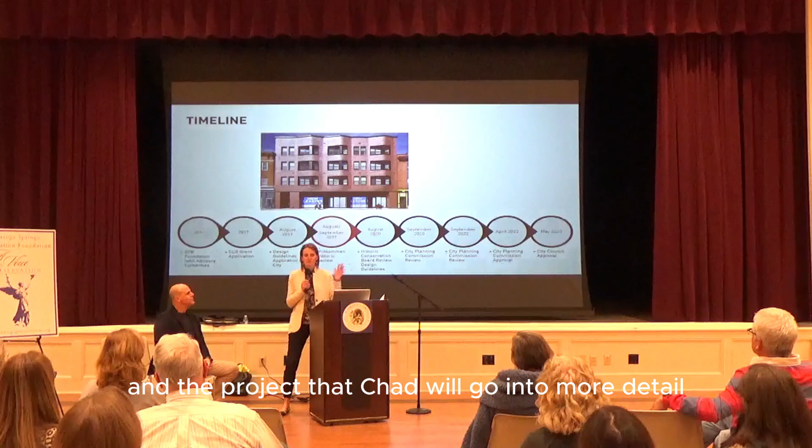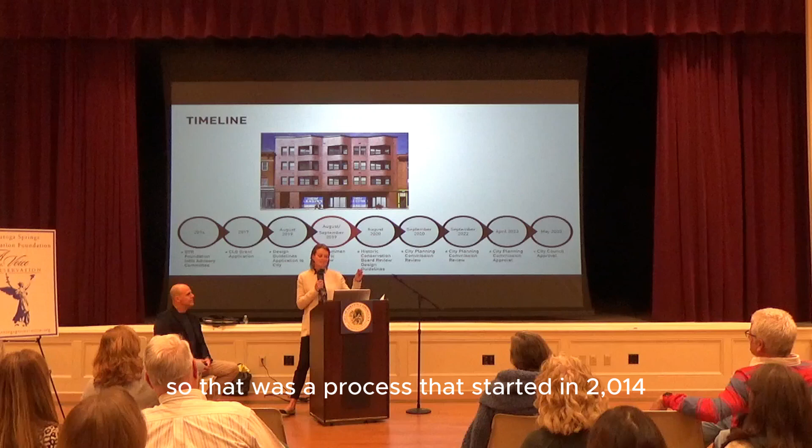So the city has, in recent years, had a lot of conversations about how to address that infill. And the project that Chad will go into more detail, Willkommen, it really fell right in the middle of a very long process of revising the Over-the-Rhine design guidelines. That was a process that started in 2014 and ended with their final adoption in 2023.

And Willkommen was going through the review process in 2019, right at the same time that the first draft of the guidelines was being presented.

So taking a step back, Over-the-Rhine saw the traditional patterns of disinvestment many urban areas saw through the 60s. Population declined, but many of the buildings remained intact.

By 2003, that was when the previous guidelines were adopted. The majority of development happening was rehab. There wasn't a lot of infill happening. There was a resurgence starting, renewed interest in the neighborhood, but more rehab and redevelopment of existing buildings than investing in infill. So it was not a primary consideration when those last design guidelines were developed.

2005 was really when the neighborhood started to see its first major infill construction begin. You can see this project on the screen. This is at a relatively prominent gateway site along the former site of the canal on Central Parkway. This project was ground floor retail, 25 residential condos, and a parking garage.

And from there, throughout the next decade, we saw more and more infill. Various forms, various scales, as you can see here, from row houses to larger scale mixed-use, multifamily development. So much so that by 2014, the conversation was starting about needing to look more closely at the infill and the design guidelines for the city.

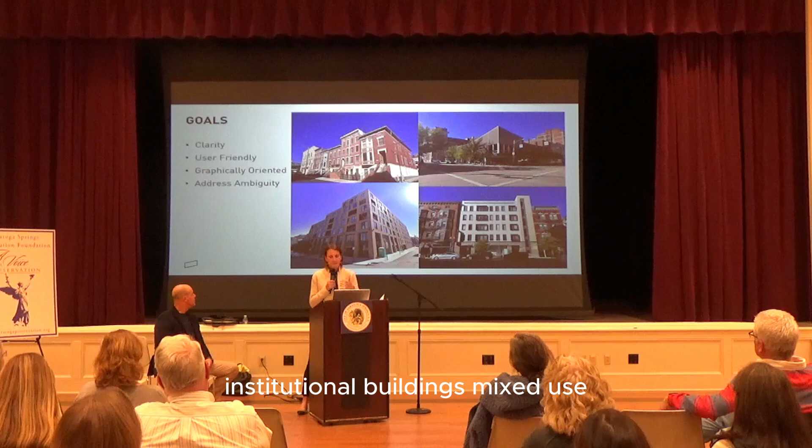Institutional buildings, mixed use, row houses, that we felt were meeting that goal of contemporary but compatible. And really our goal was to make it more user-friendly, more graphically oriented, and provide more clarity.

Over the next 2 years, before the first draft was published, I think it's fair to say that somewhere in there we lost a little bit of that goal to make them more user-friendly, as we went from a 3-page document to over 60 pages of guidelines in that first draft.

So when we got the first draft of the guidelines in 2019, there were concerns expressed by city staff, design professionals, developers, and other neighborhood stakeholders. They really fell into 5 primary buckets: they were too prescriptive and formulaic, the way height was addressed, the extensive use of must instead of should in the language, how storefronts were addressed, and how modern features were addressed by the guidelines.

I'm just going to walk you through what the issues were in that first draft. When we look at being too prescriptive, these guidelines use the word median a lot.

There were a lot of calculations needed just to understand what your massing could be. For example, building width should be consistent with the median building width of non-monumental contributing buildings located within the same block face. So if you have a vacant site, before you can even start to wrap your head around what massing is appropriate, you'd need to survey the whole block, figure out what's contributing, what's not, what's monumental or non-monumental, and then do the calculation. It was overly burdensome to start the process, and I think it was well intended — the idea was to quantify what compatible is — but that's a hard thing to make a formula get the right outcome for.

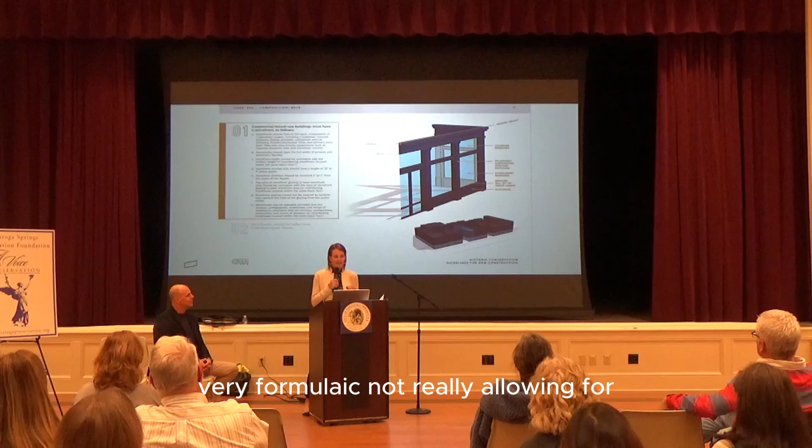Storefronts had a similar issue — a lot of use of median, a lot of very specific measurements, like 2 inches to 4 inches of glass inset, 18 inch sill height. Again, very formulaic, not really allowing for a contextual review of the block and developing your design from there.

One of the things we were seeing in infill design, as people moved back to the downtown urban setting, is that residents wanted features that weren't part of the historic landscape. They wanted roof decks and balconies in a dense urban setting, some outdoor space. They wanted a place to park their car off-street, and they wanted a vehicular entrance.

The initial draft of the design guidelines again had a lot of musts that left no ability to design these features in a context-sensitive manner. It was very prescriptive — for example, a roof deck was not permitted to have any access beyond the minimal stair tower or elevator shaft needed to reach it. It didn't acknowledge that you could have a bigger room or space to access the roof deck that could be entirely invisible from any vantage point on the streetscape or from farther away.

So it's not all doom and gloom. We resolved the issues. It was a longer process. This draft was presented, as I said, in 2019.

Our process is that the Historic Conservation Board reviews the guidelines. They make a recommendation to the City Planning Commission. Planning Commission makes a recommendation to City Council. They ultimately adopt the legislation.

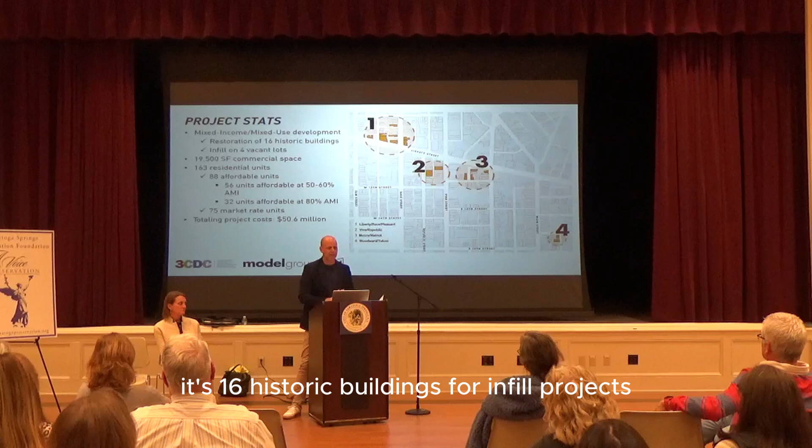So it is scattered around Over-the-Rhine, but it's concentrated in these 4 nodes. Overall, the project is built up of 16 historic buildings, 4 infill projects. So a lot of commercial square footage, 163 residential units. Half of those are affordable. We're at 50 to 60% AMI, which is a very affordable rate. The other half are market rate apartments, so anybody in any income bracket can rent those.

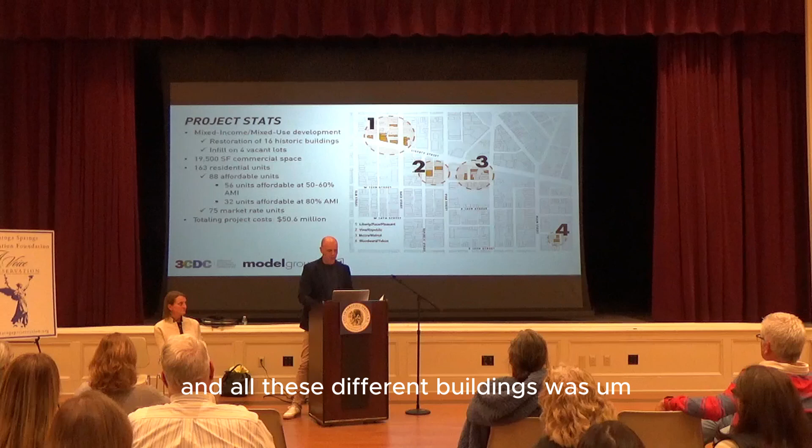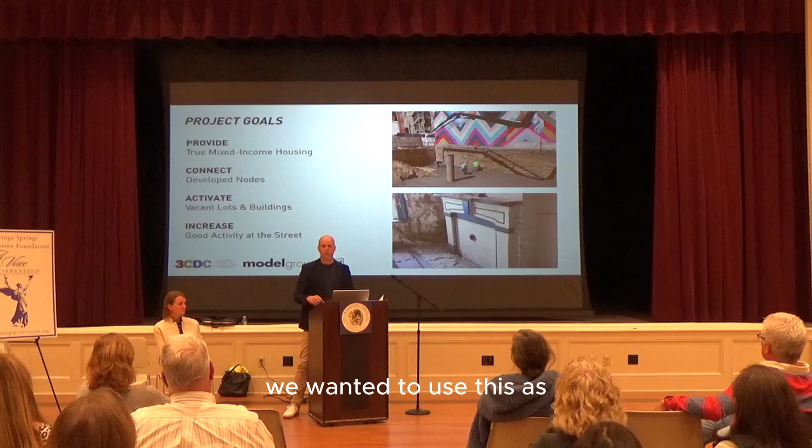And pooling those together into all these different buildings was a challenge. But we had these goals from the start: one, we wanted to provide true mixed income housing that was indistinguishable from the market rate housing in the area. We wanted to use this as another catalyst to connect developed nodes. In this slide, you see that the projects were really concentrated in these areas. It wasn't fully scattered throughout.

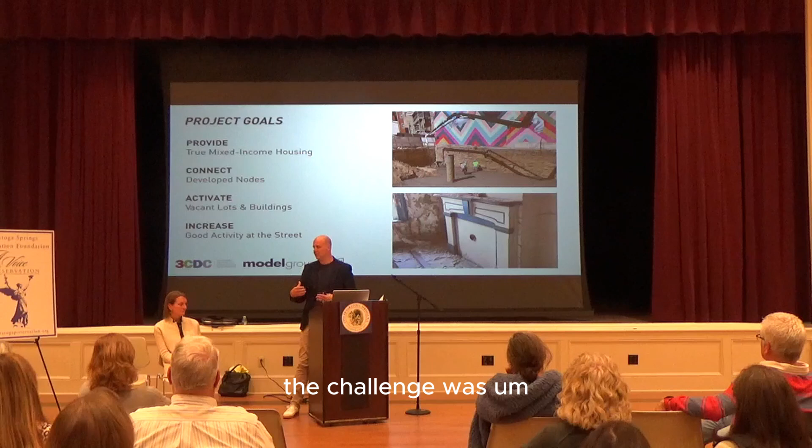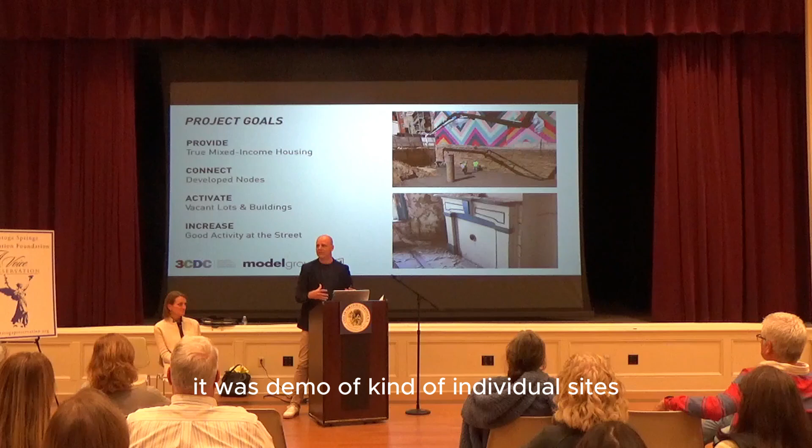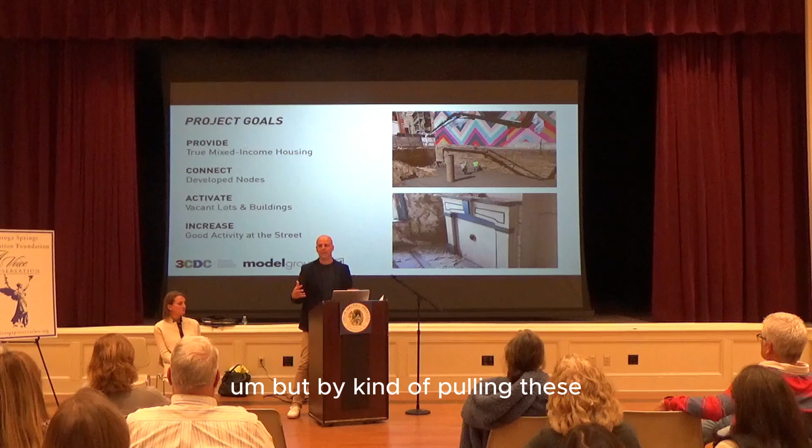We wanted to activate those vacant blocks. The challenge was, in the slide we showed where the demo happened of the individual buildings, it wasn't demo of a big site, it was a really easy development. It was demo of individual sites that all left their foundations. So they're smaller sites, so it was more difficult to make the numbers work with a smaller site. But by pooling these, we wanted to find a way to activate as many of those as you could.

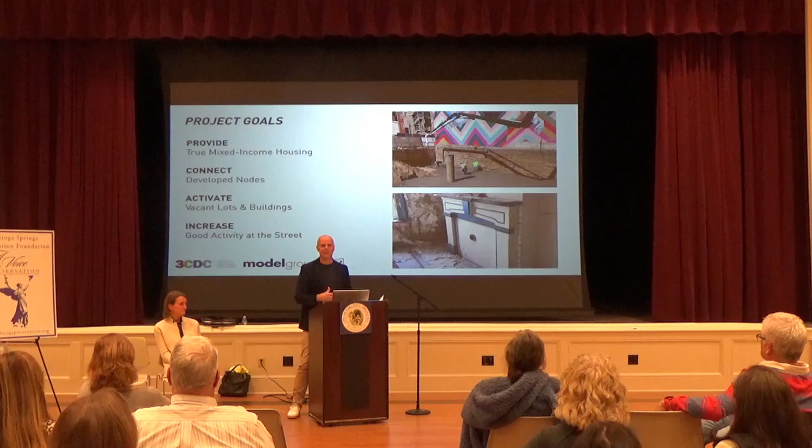So we could really re-stitch the fabric of the neighborhood together. Everybody knows those vacant blocks really create a discontinuous neighborhood, and increased street activity is the final goal.

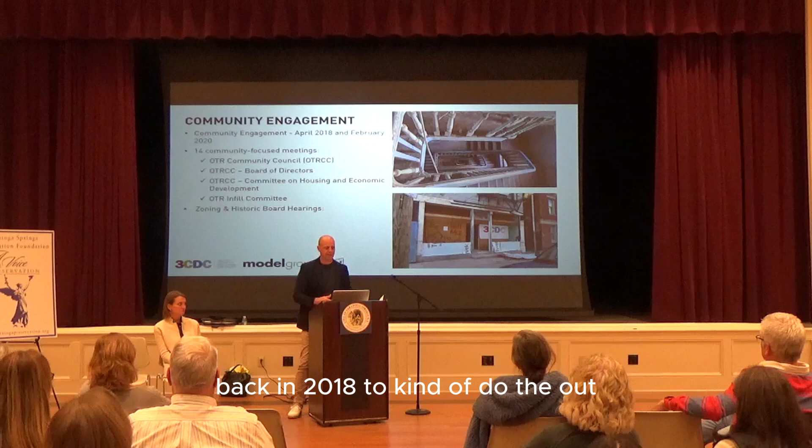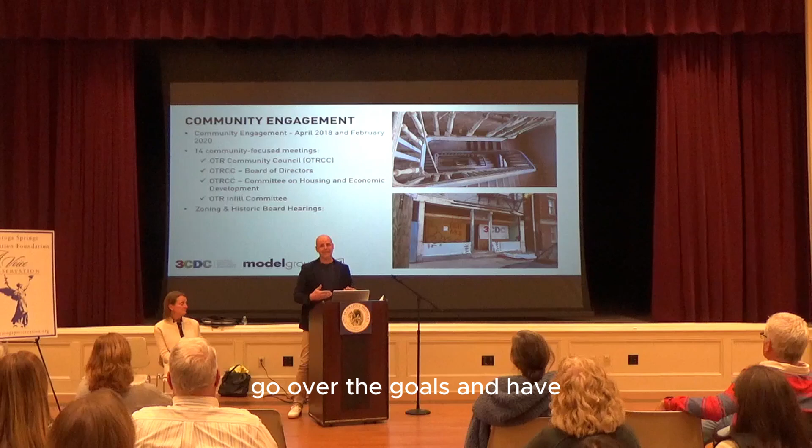So we started early on, back in 2018, to do the outreach and engagement to see what the neighborhood wants, how do we put this project together. And that's also when we started meeting with the historic staff of the city, to start brainstorming about this project and what it could be, and go over the goals, and have, I wouldn't say shared goals, but at least let them know what our goals for the project were.

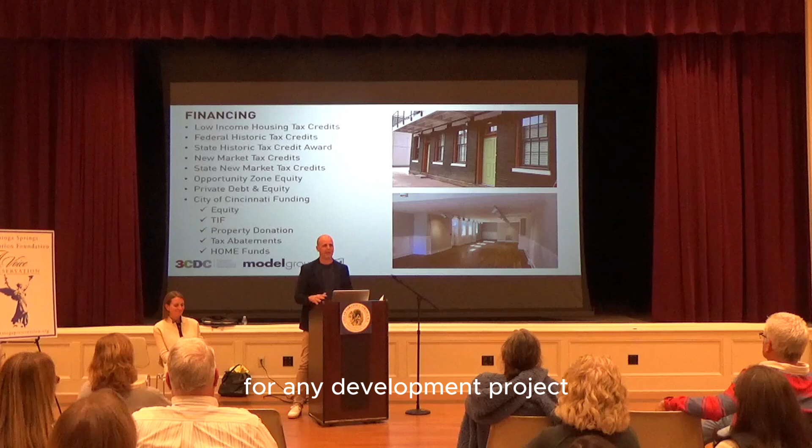Really quick on financing, because this is the most complicated capital stack for any development project I've been a part of. The developers had to access 13 different funding sources in order to put this deal together.

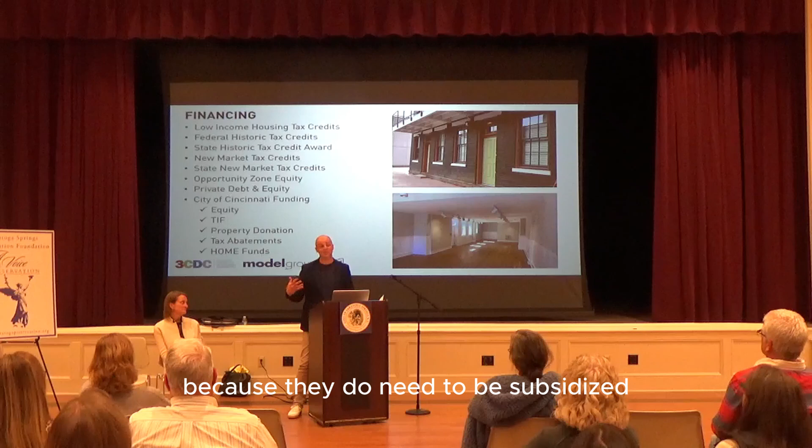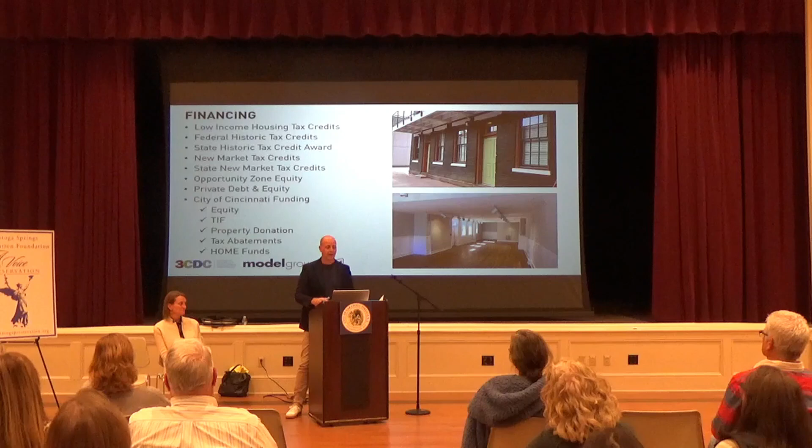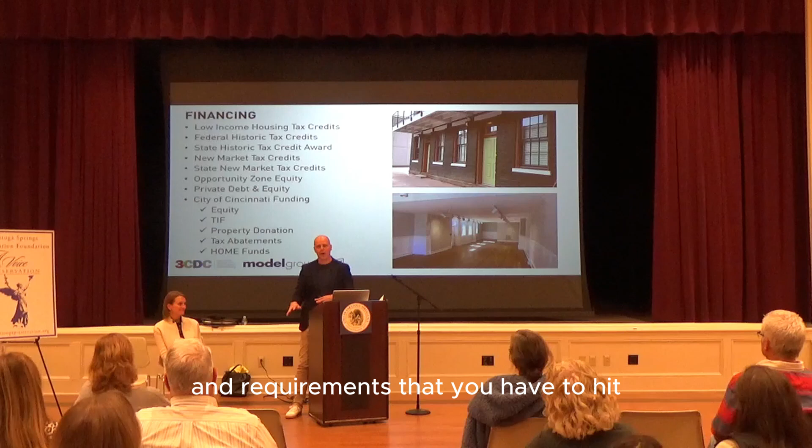It's honestly why a lot of affordable housing projects don't get done, because they become so complicated, since they need to be subsidized. We had state historic tax credits, federal historic tax credits for the historic renovations, new markets tax credits, opportunity zone equity - all these different funding sources. What's interesting from an architecture and development standpoint is that all of these funding sources have different timelines and requirements you have to hit, and it becomes this complicated web of what the project can be and the timeline it needs to be on to make it happen.

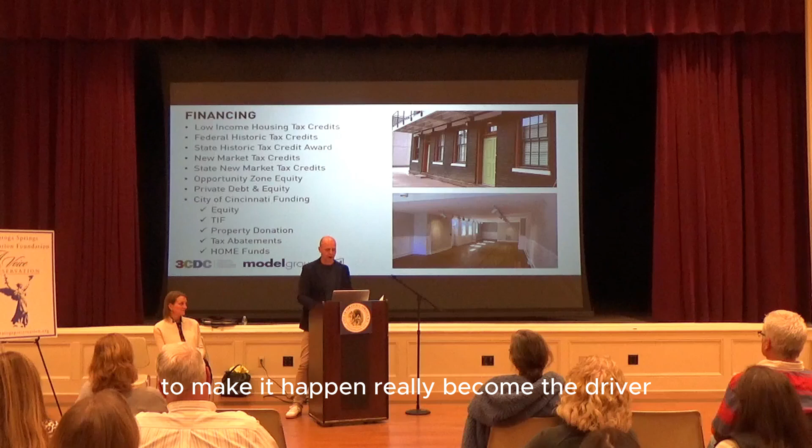That's the capital stack.

The other complicated issue with this project was that we had two clients: the Model Group, who became the operator and owner for all the residential pieces of the property, and 3CDC, the Community Development Corporation I mentioned, who became the owner and operator of all the commercial space. To do that, we actually had to create air lots and split the ownership. So each one of these buildings and lots has three-dimensional lot lines that separate the ownership, giving each individual building separation.

That was difficult. For the infill design - I mentioned this project has 4 infill projects, but it also has all these other historic projects. These are the before and after pictures, showing all this Italianate architecture. This investment helped stabilize vacant or disinvested buildings that were ready to fall down, and really protect the historic fabric we were looking for.

But it also included - and this was the important piece to make this deal work - I'm going to talk about 3 of the infill projects that were part of these scattered sites, each in a different zone.

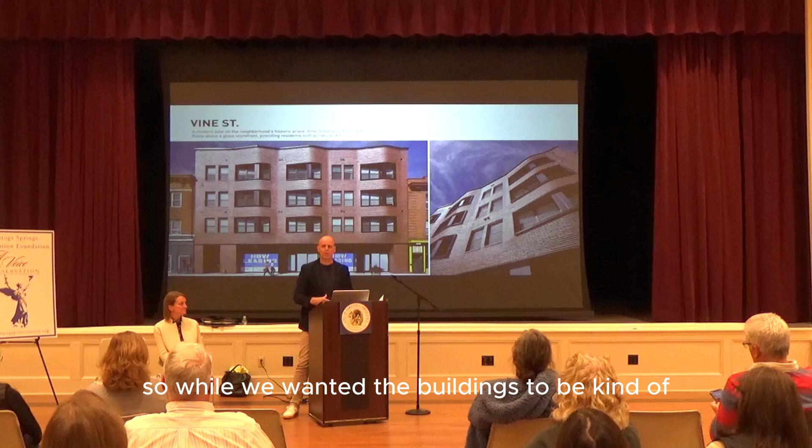It's all part of one project, but Over-the-Rhine is not a homogeneous neighborhood. There's a lot of differences in terms of the streets, the different neighborhoods within Over-the-Rhine. We wanted to recognize that. So while we wanted the buildings to be what we call siblings, they weren't twins. They had a lot of the same kind of language in terms of the palette, but each one was responding to a slightly different context.

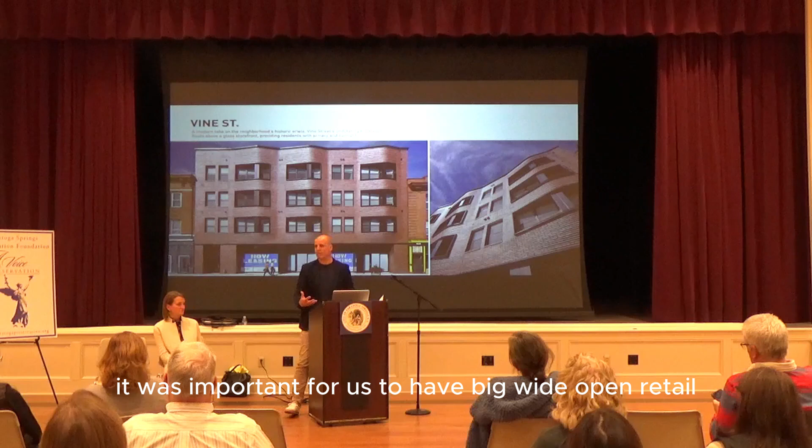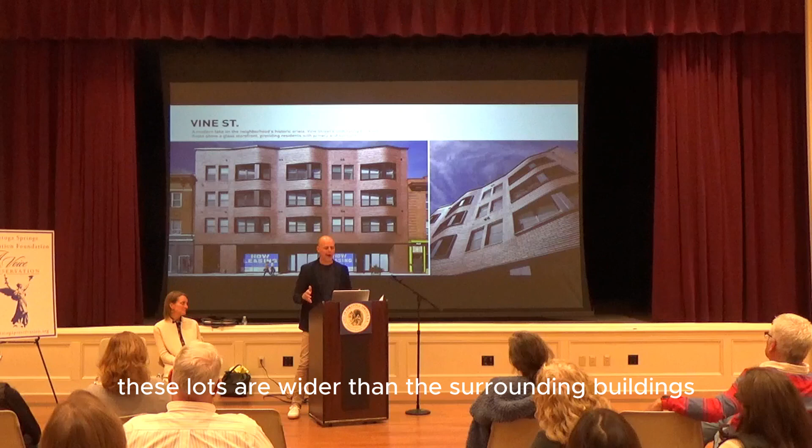In terms of the immediate street it was on, for Vine Street, which is a much more commercial street than the others, it was important for us to have big, wide open retail. This picture was taken before the retail came in, we'll update that. The other piece is, from a context standpoint, these lots are wider than the surrounding buildings. The typical lot is about 25 feet wide, and we're doing much wider development.

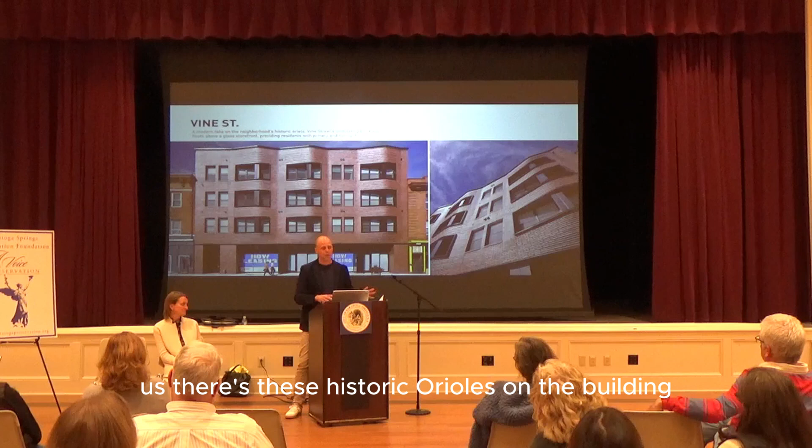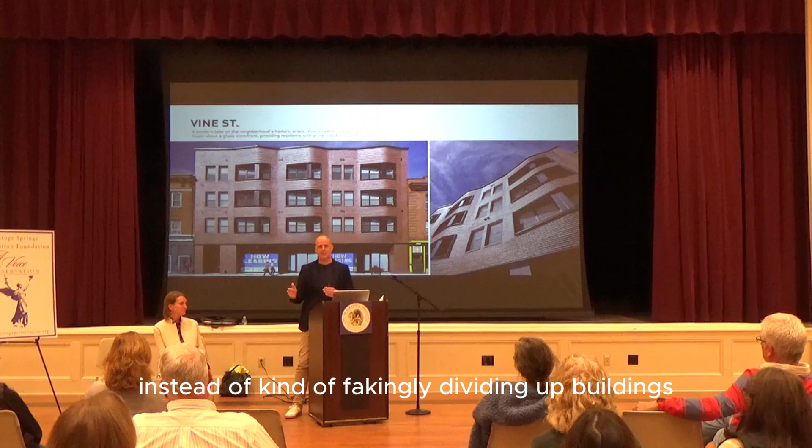One of the key historic guidelines is that the building should feel more vertical than horizontal. That was a challenge when we're trying to fill in as much of the lot as we can. What we did, and this is something we worked with the city on, is use the context around us. There are historic oriels on the building just off to the south, and some historic oriels on the building right across the street. We said, okay, that's a great historic reference—let's use that instead of fakingly dividing up the buildings. Let's use that historic language to create a rhythm that helps create verticality. We didn't want to replicate the oriels, we wanted to create a contemporary oriel, so they became this kind of wavy, undulating brick on the front of the facade to create that verticality.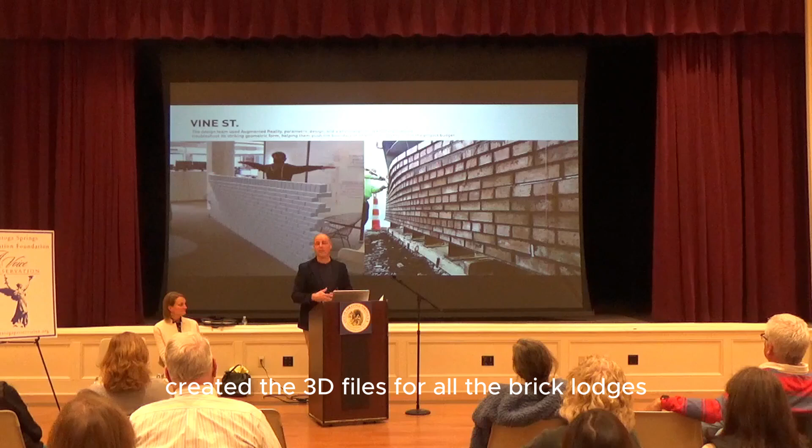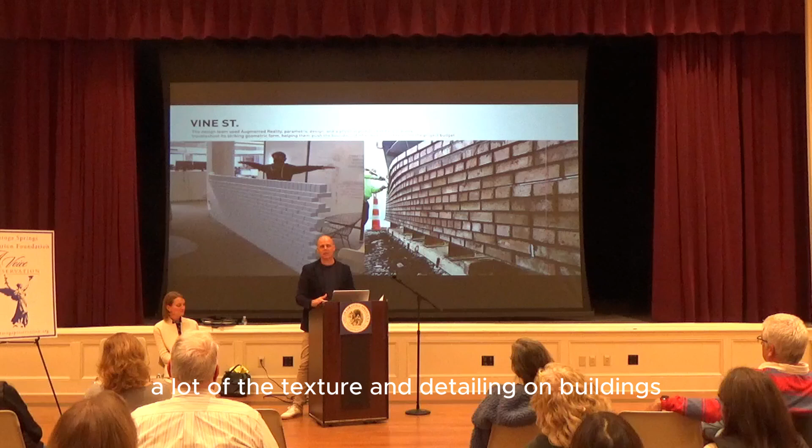Craftsmanship is not what it used to be. Masons today are not as skilled as they were when Over-the-Rhine was built up 120 years ago. Doing these oriels was a complicated shape, and we took a lot of pride in figuring it out. We had masons in our office—we actually 3D modeled everything and put VR goggles on so the masons could see brick by brick where they would get laid, and used that as a tool on site. We also created the 3D files for all the brick ledges so they had the alignment they needed. A lot of the texture and detailing of buildings is being lost in contemporary architecture because it becomes so expensive to have the skilled craftsmen needed to execute those details. So as a firm, we're very interested in how we use technology and work a little harder to bring some of that craft and detail back into our buildings.

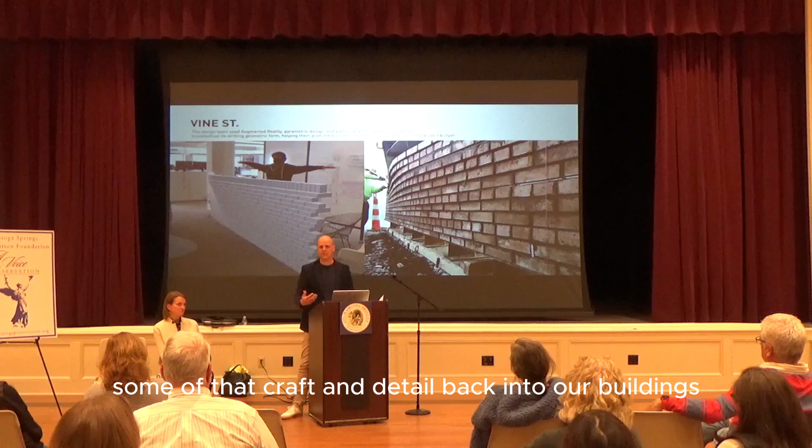So this is the historic guideline part of the conversation. For Vine Street, as Emily said, we were right in the middle. When we were meeting with the city, nobody really knew what guidelines we were going to meet. We had current guidelines, but also a draft set of guidelines we thought would be implemented in six months. On top of that, we had all the other project requirements from the tax credit and capital stack saying we had to be a certain height to fit a certain number of units. The original guidelines allowed us to be a little higher; the proposed guidelines at the time said we had to be lower. So it became a compromise—where do we need to be, what is appropriate, what is too tall that would destroy or compromise the historic fabric. We looked at a number of options with the city to get to something we all felt comfortable with, and that was done pretty early in the process, well before we submitted to the board.

Republic Street, this is the second one. The difference with Republic Street is that it's on a side street. It's much more of a residential street, a one-way street that's much narrower. There isn't any kind of commercial fabric on it, but we still wanted to create that activity.